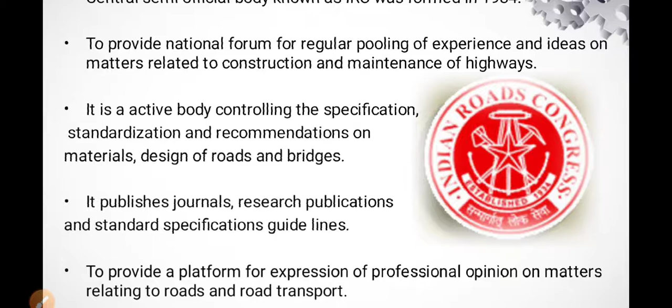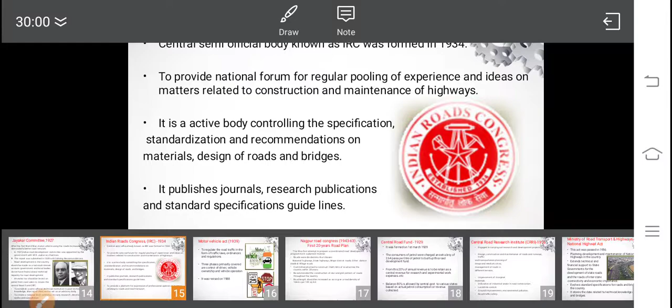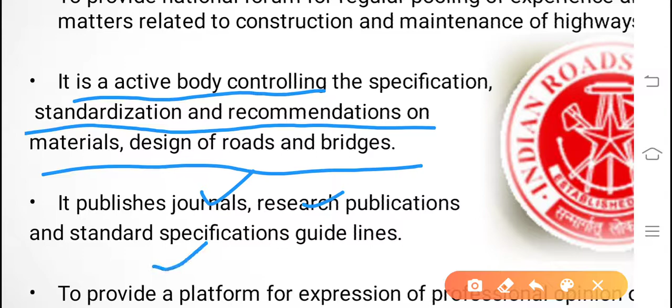Second point, it is the active body controlling the specification, standardization and recommendations on materials, design of roads and bridges. It publishes journals, research publications and standard specifications with guidelines. Also, in order to provide a platform for expression of professional opinion on matters relating to the roads and road transport, IRC was formed in the year 1934.

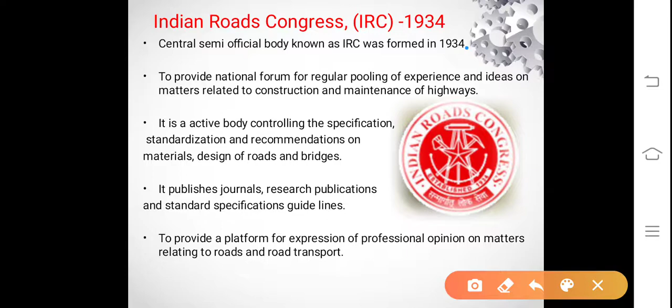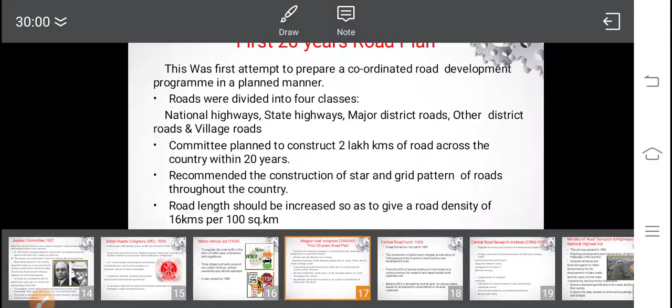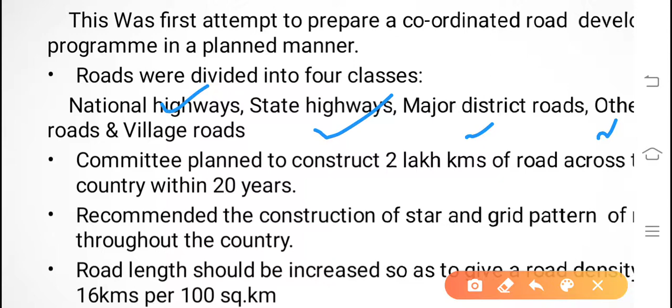In the year 1943, a meeting was convened with all the chief engineers at Nagpur for the preparation of 20 years road developmental plan, also known as long-term developmental plan. This was the first attempt to prepare a coordinated road development program in a planned manner. Roads were divided into four classes: national highways, state highways, major district roads, other district roads, and village roads.

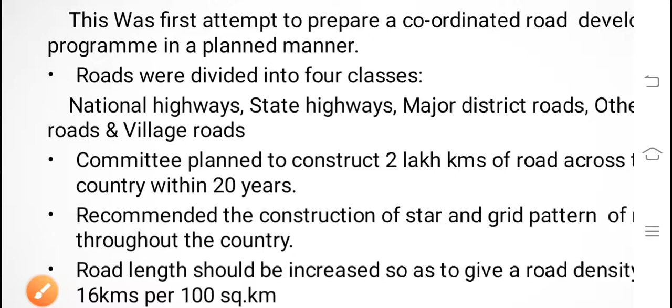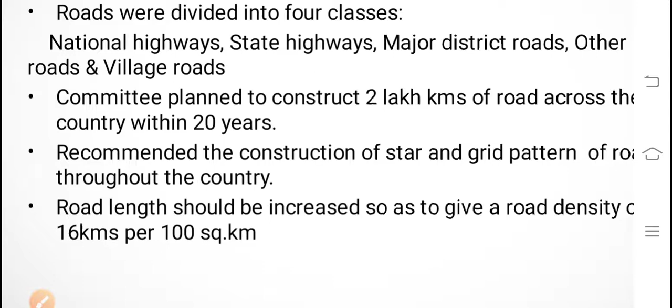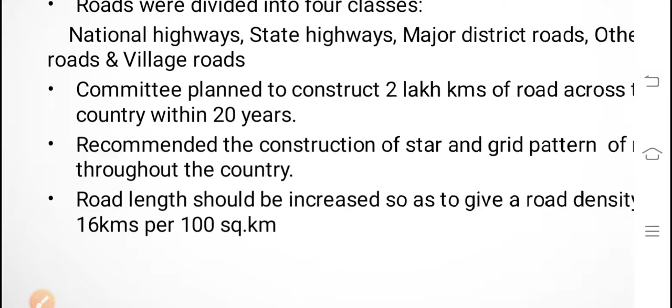Committee planned to construct 2 lakh kilometers of road across the country within 20 years, from 1943 to 1963. And it further recommended the construction of star and grid pattern of roads throughout the country. Road length should be increased so as to give a road density of 16 km per 100 square kilometer area. It was initiated by IRC. That is the highlighting point. This was the first 20-year road developmental plan. Next,

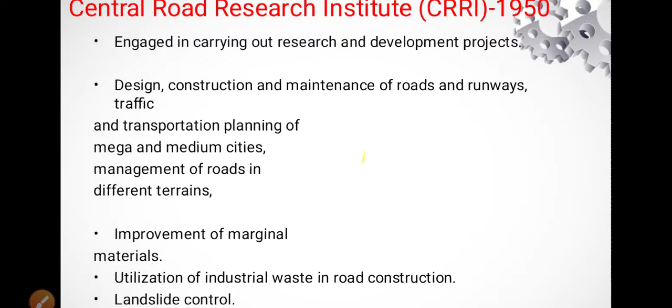in the year 1950, Central Road Research Institute, the 4th recommendation put forward by Jayakar committee, was developed in India. It is engaged in research and development projects, design, construction and maintenance of roads and runways, traffic and transportation planning of mega and medium cities, management of roads in different terrains, improvement of marginal materials, utilization of industrial waste in road construction, landslide control, ground improvements, environmental pollution, road traffic safety. So overall, this institute takes up soil testing, material testing and research, traffic, air and noise pollution control, landslide control, etc.

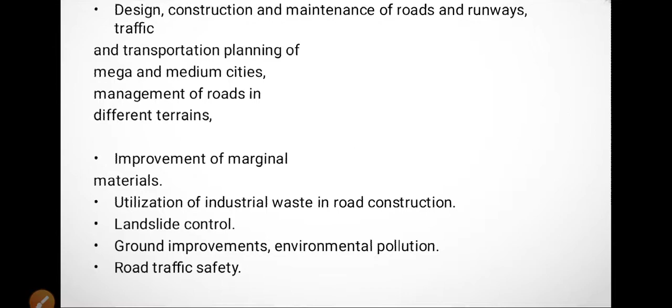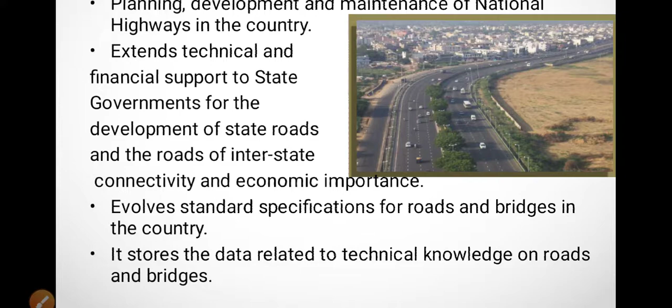In the year 1956, under the Ministry of Road Transport and Highways, the National Highway Act was passed. Because of that, planning, development, and maintenance of national highways in the country became possible. It extends technical and financial support to state governments for the development of state roads and the roads of interstate connectivity and economic importance. It evolves standard specifications for roads and bridges in the country. It stores the data related to the technical knowledge on roads and bridges.

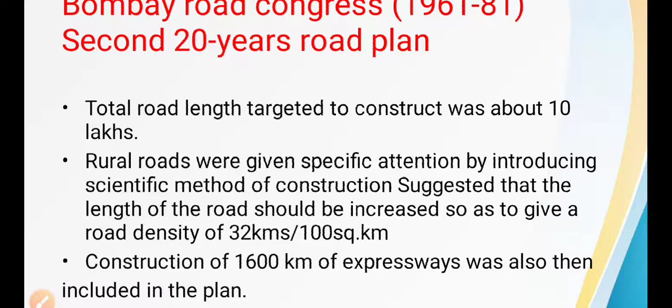Next comes Bombay Road Developmental Plan, the second 20-year road developmental plan for the period 1961 to 1981. This was also initiated by IRC, Indian Roads Congress. The total road length targeted was about 10 lakh kilometers. Rural roads were given specific attention by introducing scientific methods of construction. The road density target was double the Nagpur road plan target of 16 km per 100 square kilometer area, that is 32 kilometers per 100 square kilometer area. Apart from that, construction of about 1600 kilometers of expressways was also included in the plan.

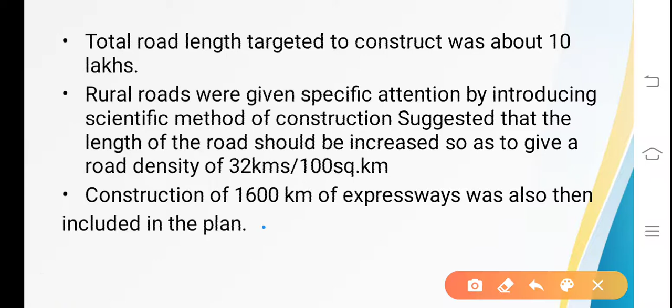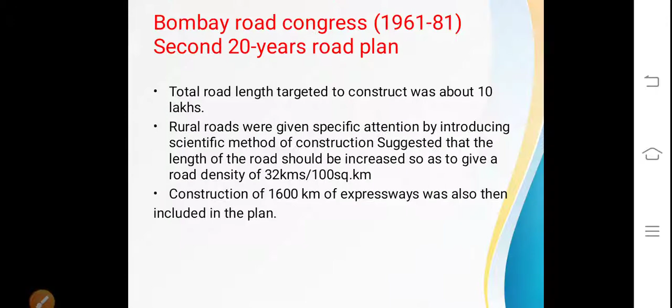Next, in the year 1973, a techno-official body known as HRB, Highway Research Board of the Indian Roads Congress, was set up with a view to give proper direction and guidance to the road research activities in India.